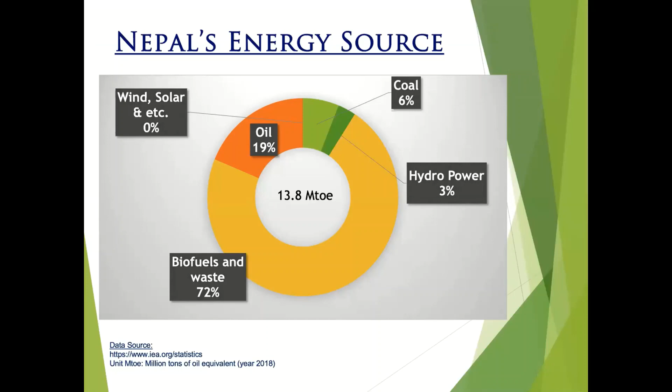The total hydropower electricity demand and supply shows that the private IPP has produced about 40% of total requirement, whereas NEA or government side is 35%. All the private sector projects are run-of-river, NEA has over 3% storage, and 22% of requirement is imported from India right now.

The theoretical hydropower potential of Nepal is 83,000 megawatts, and commercially about 43%, or 43,000 megawatts, is a commercially viable project, whereas the total installed capacity is only 1,273 megawatts.

So private sector has significant growth in this sector since the last 25 years. 55% of total capacity is produced by the private sector, about 5,000 megawatts is under construction by the private sector, and 10,000 megawatts is under study. Due to active participation of the private sector, the import of energy from India was reduced by 38% last fiscal year.

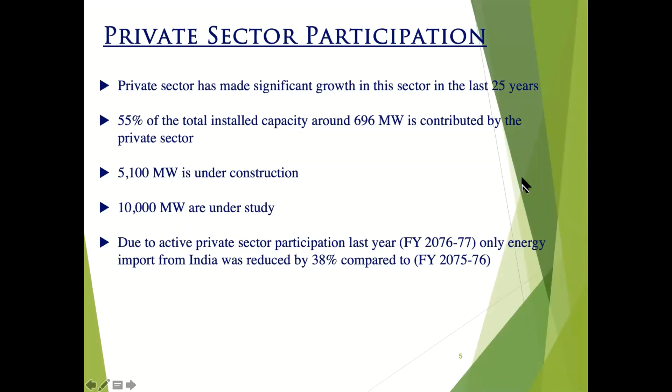So the opportunity in Nepal is very high, because political stability is there now. Before, the government changed every 9 or 10 months, but now the present government will go for 5 years. The government has announced the country will reach middle income status by 2030, which means we need a lot of hydropower or energy to achieve this goal.

Growth per capita consumption is described as 1,500 kilowatt hours. So institutional setups like transmission, generation, an electricity regulation committee, and a power trading entity have been set up by the government, along with positive policy changes and a new act under consideration.

The regional market is very high because our neighbor India has very big demand for electricity, for which a power trading agreement with India was done in 2014, an energy cooperation agreement with Bangladesh was done in 2018, the SAARC energy cooperation framework was done in 2014, and the Bangladesh, Bhutan, India, Nepal sub-regional cooperation for energy trade was also done.

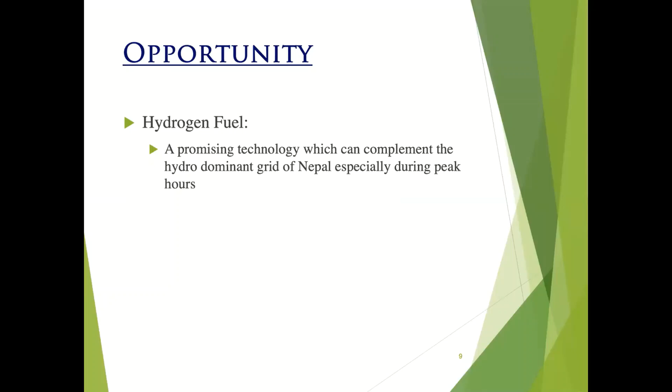At the same time, we came to know about hydrogen fuel, which we'll discuss later. Maybe the professors, scientists, and technologists will explain more about hydrogen fuel, getting hydrogen from electrolysis of water, and from that getting a fuel. We want to know more about this, and I think we'll hear in detail from another speaker. Let me say something about the challenges at the present status.

The transmission system and road network is still lacking in Nepal. Financial resources are needed for about 15,000 megawatts, as the government has declared that by 2085 (Nepali calendar), 15,000 megawatts has to be achieved. For this, about 3,000 billion rupees is required, and local bank and financial institution funding is, I don't think, adequate.

They need some funding from outside also. Direct foreign investment is required with a hedging facility, which is not available now, so the policy should be changed to achieve these goals.

There are many bureaucratic hurdles, causing delay in implementation. At present, it is sorry to say that inter-ministry coordination is not exactly what is required.

And the power generated by the IPP, the pricing and tariff should be competitive, and projects should be completed on time without cost overruns. Hydropower projects are prone to cost and time overruns worldwide.

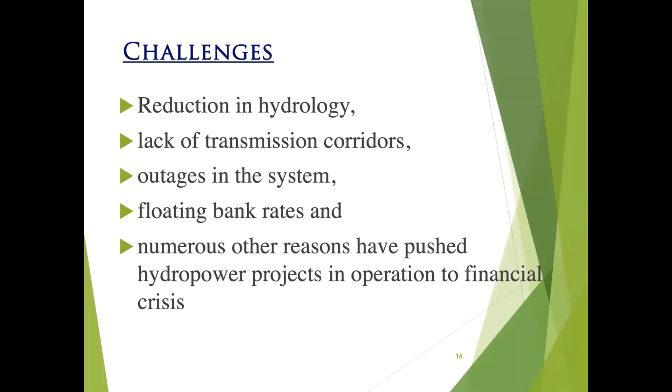The bank interest rate is not stable. Numerous other reasons have pushed hydropower projects in operation to financial crisis.

There are some other challenges also, some technical challenges also: workforce, geotechnical aspects, climate change and natural disaster.

Recently we have the COVID-19 pandemic. For its effect, we cannot forecast how much it will affect and how much cost we have to bear due to this pandemic. Because of financial crisis, the producer, the developer has faced so many financial crises, and because of the pandemic, the consumption of electricity is also reduced.

So what to do again? The way forward is to create a level playing field for all the stakeholders, private and government. A one window system should be there for all relevant clearances from the government side and from concerning authorities. Facilitate the FDI, as I told before, since local banks and financial institutions are not able to invest in huge projects. Expedite the construction of the transmission line.

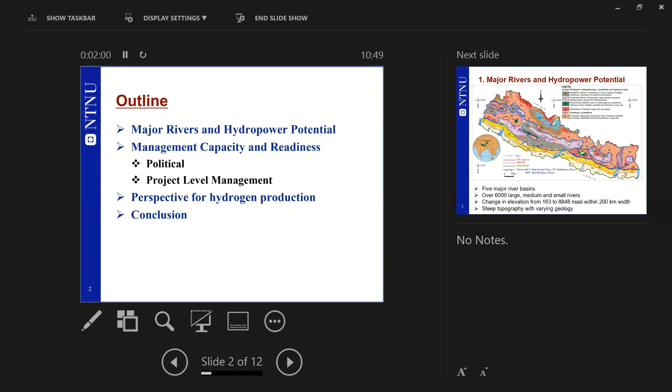If we look at this Nepalese map, we have many rivers in our country. We have 5 major river basins, 2 bordering with India and 3 major basins in between, and over 6,000 large, medium and small rivers that we can harness for our well-being.

The change in elevation is very dramatic from south to north. It starts with 163 meters, the minimum, and goes all the way to Mount Everest within a 200 kilometer width. This is incredible for us and a huge asset in many ways. We have a very steep topography, which allows us to have very high hydropower projects. We have some challenges with rock engineering and tunneling because of the varying geology, but these are not major issues. Once we have good knowledge about this, all kinds of difficulties can be tackled, in my opinion.

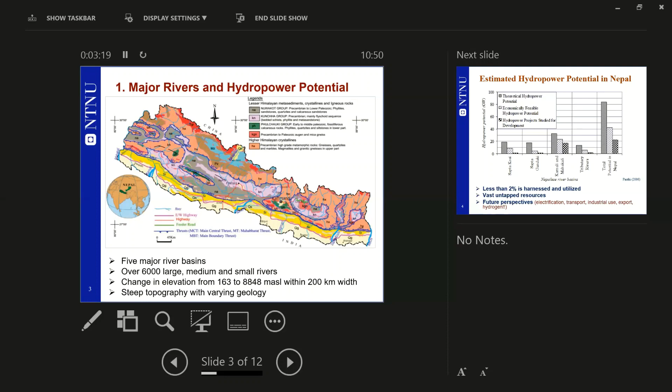If we look at the hydropower potential in the country, this picture shows the total possibilities we have. Over 83,000 has been officially mentioned, but I think it is much more than that; we have not studied how much we can really produce theoretically in Nepal. I think it should be over 100,000 with no difficulties. But today's condition is that we have harnessed even less than 2% of the potential. It would have been done much more, in fact. Even this 2% is difficult to use in the monsoon period. That shows how far behind we are, which is an issue of discussion.

Energy should be used, and it's a commodity; society will use more and more once the society is developed, so development is key here. How we can utilize these untapped resources is a major discussion that the government authorities should study and focus on. The political level management should be more educated in these sectors. They should know the best way to use the resources of the country, look at the long term rather than the short term, and make a framework that makes sense.

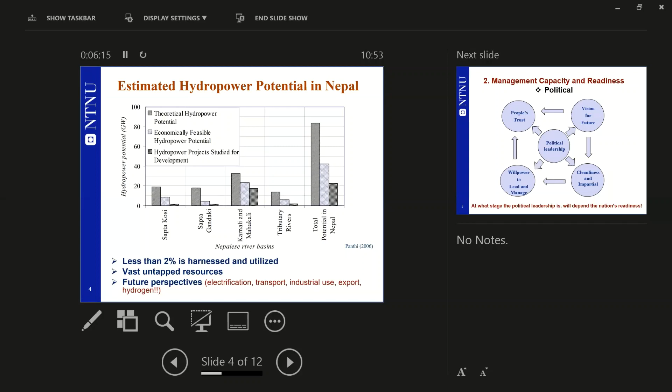If we look at management capacity and readiness, I would talk first about the readiness of the political level. Political leadership is at the center and is key for the development of any nation; it is the guide to bring a nation forward. It is not only about stability, vision is very important. We need a very visionary leadership with a good vision for Nepal's future generation. Beyond that, they should have cleanliness and be impartial. They should control corruption, control the misuse of power, be honest to the people, and be impartial.

But the tendency of our leadership is not in that direction. Therefore, the key is improvement of management capacity within political leadership; this is the very key. The present leadership has emerged through struggles and fighting to change the political system in Nepal, but how clever and capable they are in managing government institutions is a matter of discussion. One should have very good vision, cleanliness, honesty and impartiality in leading, and the leadership should have the willpower to manage and deliver things in the right way.

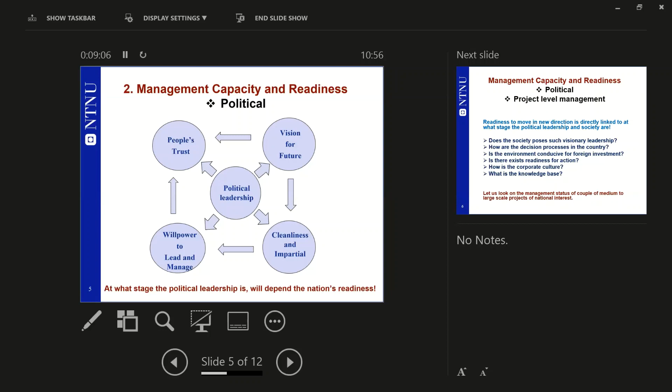So the readiness to move in this direction is mainly through the political level, which is very important. Are we ready to move in this direction? Is the political leadership and society ready? Does the society possess such visionary leadership in Nepal? When will it come? If not, if this is a visionary, then when will they act in the right way is a very important issue.

How are the decision processes in the country? How quickly do they make decisions? How is the bureaucracy? Are they efficient? Has the leadership managed to change their mentality? This is a matter of discussion.

Is the environment conducive for foreign investment? Are many international corporate companies eager to invest in Nepal? What is the investment capacity? This has to be looked at also, because to change to mass large scale production of, for example, hydrogen, we need huge investment, and we should have the possibility to export this energy abroad. So we should have linkage and know how to transport, from where to transport. These are also issues.

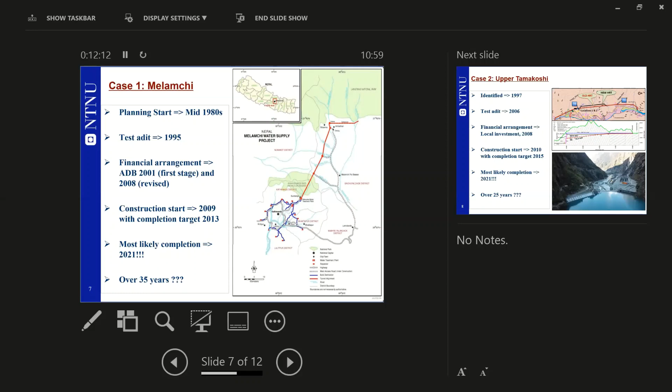And if we look at Upper Tamakoshi, it was first identified in 1996 or 97, and test adit was excavated in 2006. Financial investment was managed in 2008, and construction was supposed to be completed in 2015, but it has not been finished yet, and most likely it will be finished in 2021. So over 25 years to build a medium level project. This is what we are.

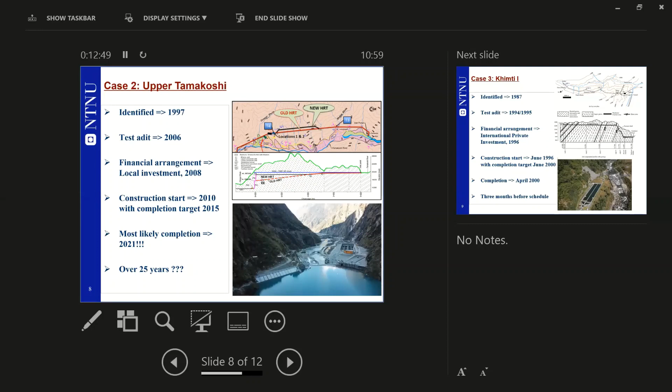But this is not the only case, we also have successful cases like, for example, Khimti. It was a private investment, the first private investment in Nepal, identified sometime in 1987, with some investigation or test adit work during 94-95. Financial closure happened in 1996, and construction completion happened even before the stipulated time. So it is possible to manage projects in the right time even in Nepal, but we should have very good and right direction on it.

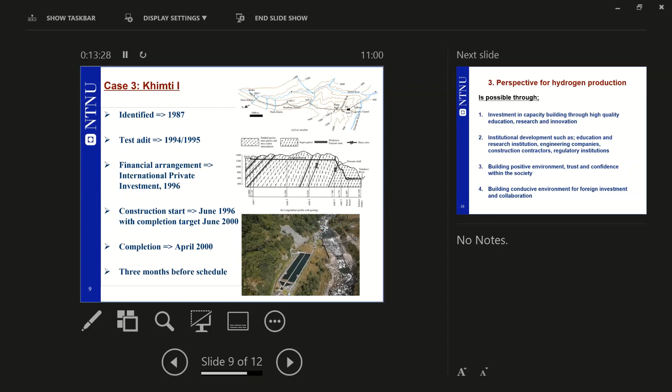So what is the perspective then? Investment in capacity building through high quality education, research and innovation is needed for the country. Institutional development such as education and research institutions, engineering companies, construction contractors, regulatory institutions are very important to go in the right direction. Building positive environment, trust and confidence within society is key. Building a conducive environment for foreign investment and collaboration is a must. This is the area where we should focus.

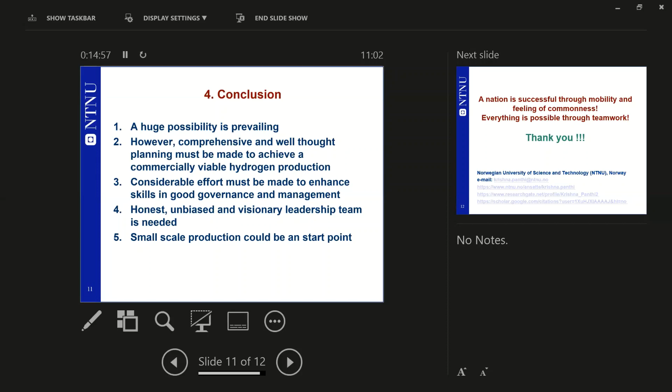Thank you, Professor Panthi, for highlighting the potential use of energy for the hydrogen market. But despite the potential for hydrogen, as you mentioned, there's a requirement for visionary leadership in terms of policy as well as management to attract FDI projects, so that the environment is conducive for large-scale industries to come in. Thank you.

With that note, I'll move on to a very exciting topic. This will be presented by Professor Ole Gunnar Dahlhaug, and his topic is European perspectives on hydropower to hydrogen application, and the message from there to Nepal. I happen to have worked with him while I was at the Hydro Lab, so nice meeting you again, Professor Dahlhaug. He's a professor at the Department of Energy and Process Engineering at NTNU, and currently leader of the HydroCen project at NTNU University, which is the largest R&D project in hydropower in Europe. With that note, I hand the mic to Professor Dahlhaug.

Thank you, Pratik. Krishna, can you turn off your view so I can show my screen? Just a minute. Stop presentation, sir, there is a stop presentation option. Yes, I have not left my presentation, I think. How to do that? Stop sharing, and then Professor Dahlhaug can share his screen. Yes, thank you, sir. All right, I'll try to make it visible. Let's see if I can. All right, can you see my screen now? Yes, yes. All right, okay, thank you.

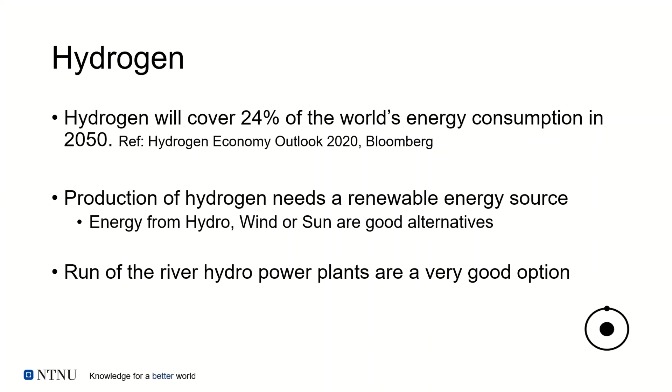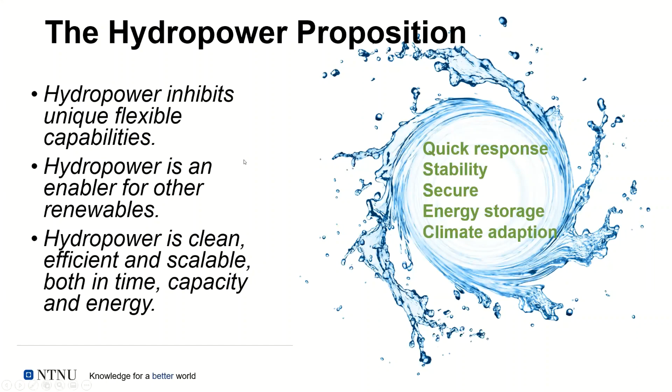Right now, 26.5% of the electricity generation in the world is coming from renewables. Out of this, 16.4% is coming from hydropower. And we know we have 4 times more capacity, meaning the potential is 4 times more worldwide. For sure, some of this will be utilized to generate hydrogen.

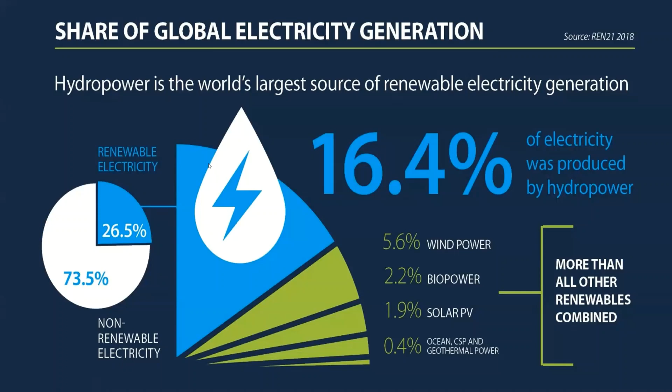The European ambition is targeting 32% renewables in 2030—I think they are now talking about 33. And it has to be carbon neutral by 2050. That's the ambition we have, and of course Norway is coming along on that ambition.

Just take a look back at what has been done. As early as 1991, Germany introduced the first feed-in tariff for renewables, meaning if you had renewables and put them online, you got extra paid for it. In 1997, EU had a target of 12% renewables by 2010. Looking forward to 2009, the target was 20% by 2020. Today the target is 32% by 2030. The whole thing here is that we are going from feed-in tariffs or extra payment for renewables to extra cost for emissions. There's no doubt the Paris Agreement introduced tariffs or extra cost for emissions in the system, meaning it will no longer be feed-in tariffs for new renewables, but taxes for emissions. That's the big change.

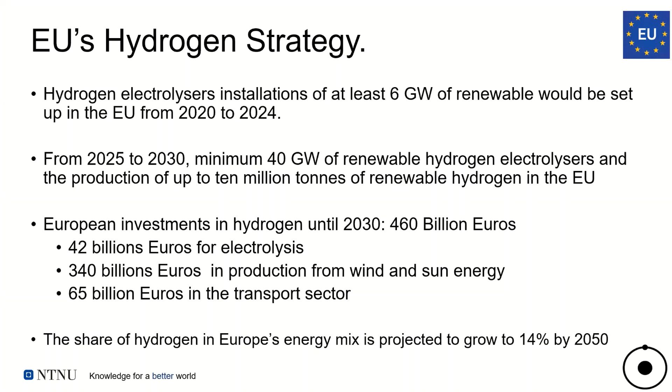If you look at the Norwegian ambition, we are of course following the EU ambition, and sometimes we tend to go a little bit higher. In our case, we aim to reduce emissions by 50% by 2030, and we aim to reach carbon neutrality by 2050. It means the emission has to be reduced by 95% compared to 1990.

The production of hydrogen, in our case, can come from natural gas. If we capture the carbon, the CO2, and store it, then it's called blue hydrogen. But that's an intermediate solution, at least until it's cheaper, and for a period of time it's a possibility for Norway. But in the long run, we will utilize hydro, wind, waves, sun, and biomass.

Right now, the Norwegian Research Council is giving money for the development of technologies that can produce hydrogen from these renewables. We have a history of producing hydrogen - we had electrolysis above 100 megawatts in the 1940s. So we have some information about it and some experience.

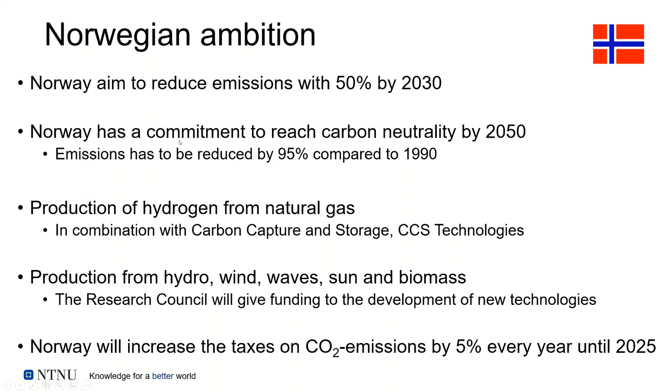I know that Nepal has a huge possibility, and its system is maybe better to handle it than the Norwegian one. You have a large hydropower potential, technically and economically feasible - I heard 42 in the former presentation. You have mostly run-of-the-river power plants, meaning excess energy available in monsoon season, which is perfect for producing hydrogen. It can be produced in small local units, and can be done without grid connections.

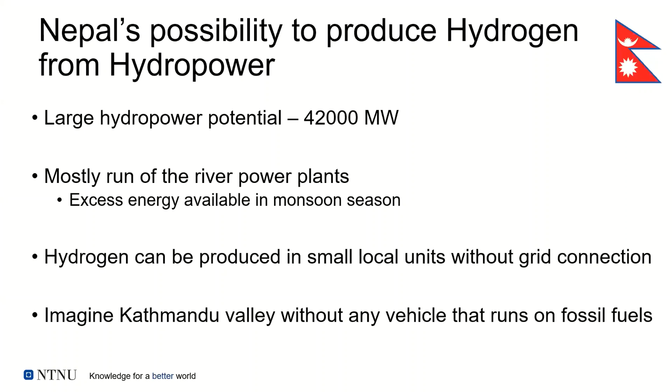Imagine Kathmandu Valley without a vehicle that runs on fossil fuels - it would be a better place. No doubt about that. I believe it can be handled. I think it's possible. Thanks.

Thank you, Professor Dahlhaug, very interesting presentation from the European perspective. I didn't have all the data, but I can see from your presentation there's an immense potential coming up for the hydrogen market as an energy source, especially in the form of transportation. Like you mentioned, if we could use it in Nepal from the monsoon surplus energy, and use that in transportation to supplement the oils and fuels we have been buying from abroad - from our own water resources, that would be amazing. Using water itself to produce energy, and then splitting the water again into hydrogen - this is amazing. To me it's fascinating, but definitely it has to be commercially viable. Thank you for your very nice presentation.

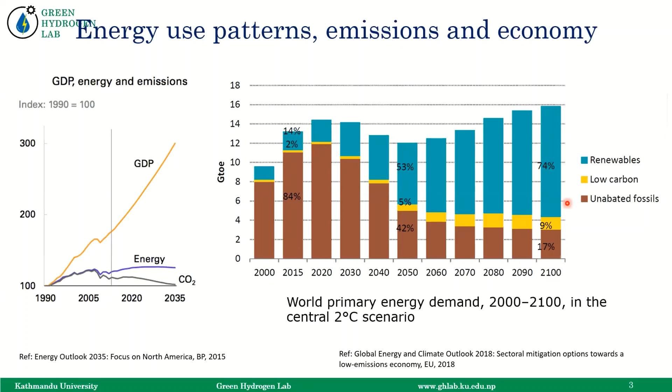If you go to 2100, you can see almost 80% of energy is not from fossil fuels. That's a huge change, and that means a lot of things happening around the world - solar, wind, and other parts as well. A lot of people see hydrogen as one of the major components - that's a key thing that drives the change.

From 2015, projections to 2050 show the consumption of hydrogen or demand for hydrogen will rise more than 10 times. Right now we are limited to feedstock industries, some chemical processing industries, but many new dimensions are coming up. A big part of the energy will be consumed in transportation. A huge part of energy from hydrogen will be consumed in industry, building power, new industries, power generation.

So a lot of new things are coming around the world, and that will change the economy, change our employment patterns, change our politics, and change what we should teach in our university to provide new batches of engineers and policymakers to make these changes. That's a huge change. We can feel that by 2050, the world will not remain as it is right now - it will change quite a lot, and hydrogen is one of the indicators that will drive that change.

In Nepal, there was some hydrogen application in the past until 2013 - we saw some hydrogen industries, or industries based on hydrogen, but suddenly it dropped down. There are many reasons behind that, but we want to see new industries coming up, maybe taking over this part of the transition in future. That's our role, that's our generation's contribution.

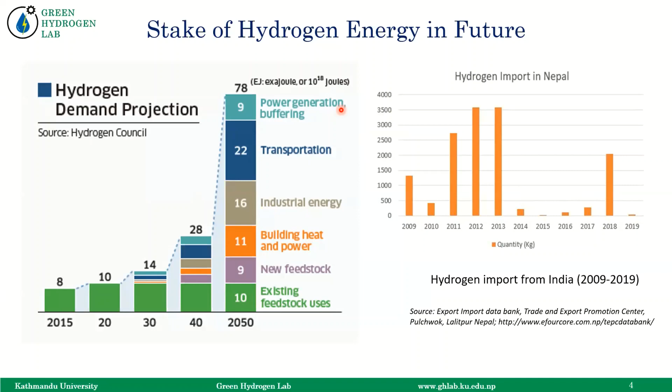We see hydropower as a contributor, because hydrogen is not a primary source of energy - it's a secondary source, an energy carrier actually. So we need a primary energy, maybe from natural gas, solar, or wind. In our case, we have hydropower - more than 24,000 megawatts of hydropower are in some stages of development, and by 2030 we can expect 7,000 megawatts of new hydropower plants being developed in Nepal.

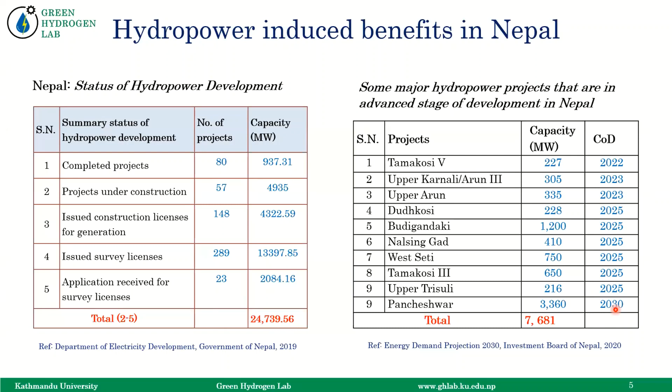That's a huge project, huge prospects, and that's our opportunity - we should be able to cater to them in some ways. Of course, a lot of debates are there to export the electricity and make money out of it, but Professor Panthi has outlined that's not the best way to do it - we need to consume something inside as well.

If we see in 2030, the demand of hydropower locally, in the best scenario with all cooking stoves changed into electricity and 50% of small vehicles converted into electric vehicles in Kathmandu Valley, the demand will still not rise more than 10,000. But in the best development situation, we will have 18,000 megawatts power generated. So we can clearly see the surplus amount of energy that is there if we don't intervene, if we don't have new industries, if we don't have new solutions to the problems we are facing right now.

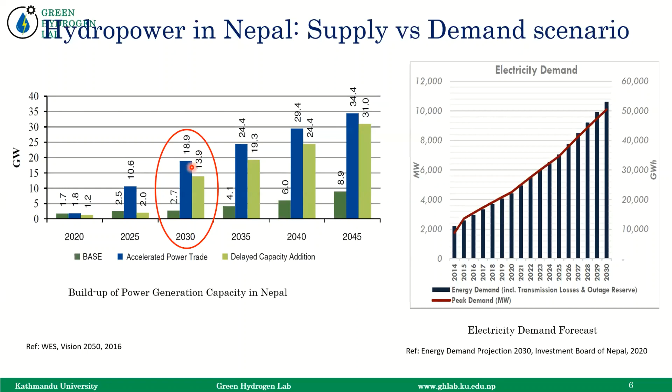That needs some critical thinking. Professor Panthi has quite interestingly led the foundation, and that's where the political activists or political movements should have a better idea. That should be where universities should contribute.

If we are able to sell or utilize that electricity, at least we can have some projections by 2025. If we start to export or utilize that electricity in a better way, then this is the scenario. The projection has shown that Nepal has an immense possibility to become rich just by utilizing hydro energy, $3 billion per year in 2030, and that could be as high as 10 billion per year in 2045, just by utilizing our electricity, maybe through export or other forms. This is a huge opportunity for our generation.

But some other studies have a bit different findings. So even if we develop our hydropower, we can see what the scenario of petroleum products will be. It has exponential growth. I was quite surprised, quite angry actually, to be honest. I don't want my country to be hydro rich and still dependent on rising fossil fuel use, particularly diesel, which is shown as the trend and will keep increasing. Diesel is normally considered a fossil fuel that cannot be decarbonized.

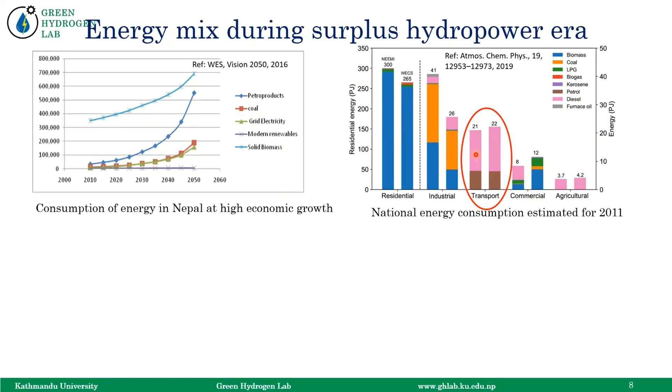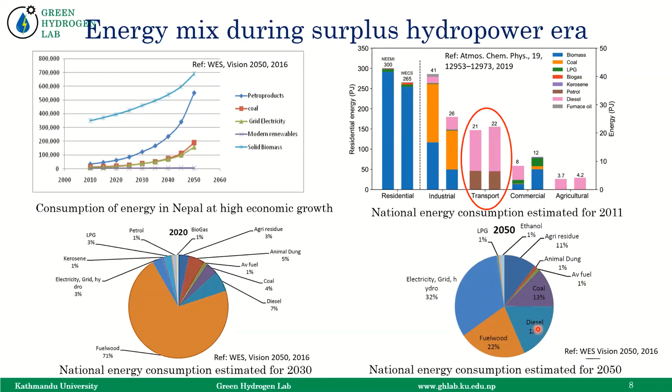The projection shows, if things go like this and Nepal becomes rich by exporting hydro energy, what will happen? From now, if things continue like this, we have 7% dependency on diesel, and that will rise to 18%. That is huge. Right now, billions of dollars are going to India and abroad just to import diesel. And if it takes 18% share in our economy for energy, our generation won't be happy about that. I think the next generation will feel very bad about our generation, that we knew it was going to happen but did nothing to intervene. The rise of diesel consumption from 7% to 18% will be, to be honest, a curse for our country.

There are some other challenges. We are still considered a very, very poorly developing country, where the rest of the world is crossing towards $20,000 per capita, while we are stuck at $1,000. Trade deficit is immensely high, nearly impossible to recover from. Farmers are standing in queues despite coronavirus, with no social distancing. A lot of people are just standing in queues, which can be as long as 2 kilometers in some cases. So many things are happening.

But on the other side, 200 megawatts of spill energy is happening every night this monsoon season. It's expected that 400 megawatts will be spilled next year, and that will continue to increase. Our grid quality and reliability for power trading is not good. In this condition, India, for example Tata Power and other companies, isn't going to buy our electricity because of our low quality of power and reliability. Our projects, particularly small ones, are getting sick and close to bankrupt. Due to the excess grid, the micro hydro sector is on the verge of collapse.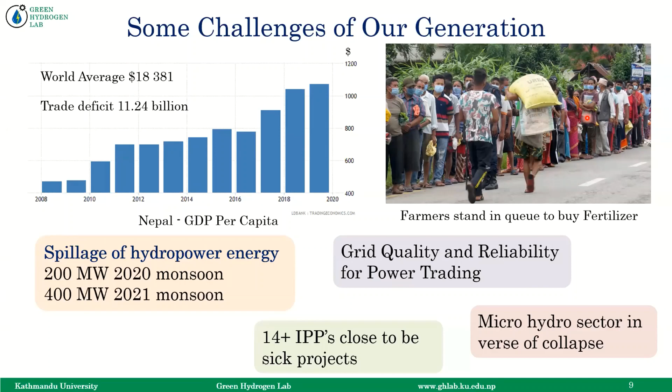So this is the challenge for our generation to tackle, for our leadership to handle. I see there are of course political and other areas, but hydrogen could be one of the interventions we can make. We can learn from others and implement it in our case. Maybe on transport to replace diesel, maybe on electricity for grid balancing and maintaining quality, new industrial processes, fertilizer plants, chemical industries, a lot of mining industries are coming up. The next business in Nepal is heading towards mining after the cement industries.

And of course, we have the possibility to export. If Norway and Europe are consuming a lot of hydrogen in the future, why not Nepal can export? Why not Nepal can be an exporter of hydrogen in the world context? That's part of our study. So that is our realization, the institutional realization of Kathmandu University, that led to form something we call the Green Hydrogen Lab. And I am trying to push our research. We were approved on the 2nd of August.

So it's less than 2 months old, but we have been able to find very good and competent researchers that are working on different aspects. We carry the vision to strengthen our industries in Nepal to produce, store and transmit hydrogen at commercial level. Our vision is technology transfer and local adaptation.

We cannot do the fundamental research right now, but of course a lot of countries are doing the fundamental research. So our aim is to transfer the technology, adapt it to local conditions, do the research that our country and our industry needs, and produce the human resources that can handle future projects in Nepal.

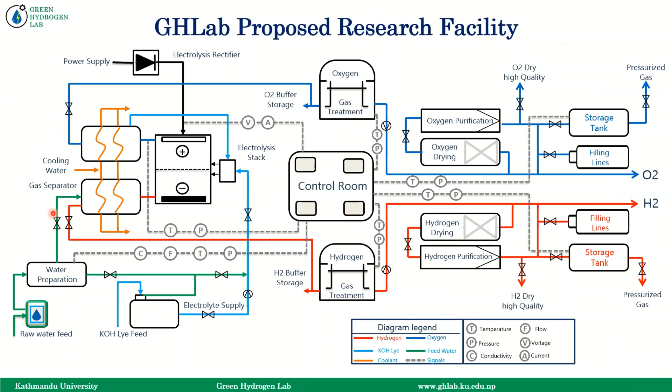We have so many things going on. We have proposed a full-fledged lab. I will not go into details, but so far we have done all the contributions from the university alone. But the university alone cannot do it by themselves. We need contribution from industries, from the hydropower sector, from government agencies, from grant agencies, to build up the facilities, to conduct the research, to transfer the technology, and to create the human resources that we need in future.

The priority is what we call green hydrogen as a fit. This is the new technology that can make the country, Nepal, and the region fit — fertilizers for Nepal, food security and food stability, industrial sector. We can have a boom in the industrial sector through introduction of hydrogen, particularly in mining and iron processing industries right now, and also in transport in future.

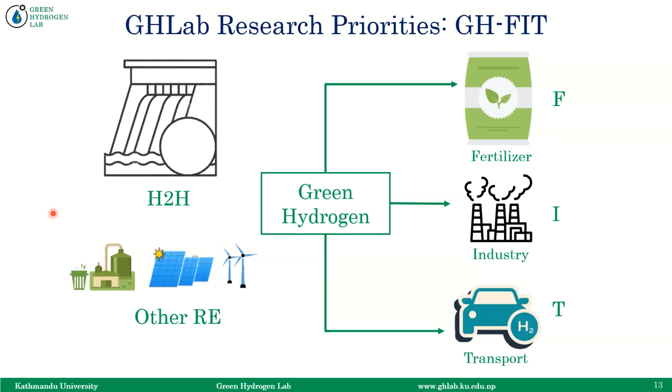We focus on hydrogen through hydropower at priority, but also from biogas, wind and solar as well. We have already started to talk on the demonstration project level. This is one project that Kathmandu University and NEA Engineering Company are jointly working on. Hitendra Dev Shakya, MD of the NEC, will discuss more about that.

But we can say we want to start with something real, practical, implementable, and having some impact — small scale, 500 kilowatt, producing urea for fertilizer. That could initiate a lot of things; we can learn so many things from this project, and so many experts can be engaged with us. If we are successful in this project, of course that will open a door.

Maybe Nepal can cater to 100% of the demand for urea locally. Maybe one day Nepal can export urea back to India, because India is still importing urea from Saudi Arabia and other parts of the world. Of course, economy, technology, market competitiveness, political readiness — everything is there.

But from the university perspective, this is our move, and we keep on moving. We keep on pushing people to make the conscious decision. That's the role our lab and university has taken up.

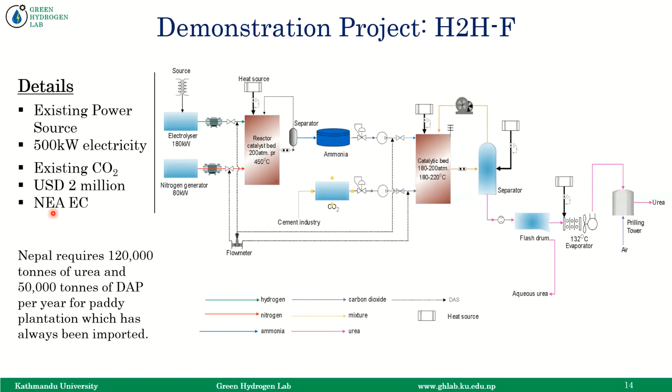So this is something we like to visualize: Nepal in 2040. We want to see Nepal as a green hydrogen ecosystem. Of course the rest of the world, particularly Europe, will achieve something like this in 2030, as Professor Ole Gunnar mentioned. But at least for Nepal, if we start today, maybe in 2040 we can say farewell to fossil fuels and invite a lot of electrical-based technologies, driving from hydropower, solar, wind, and biogas.

And of course we want to see the green hydrogen lab evolve and contribute to the development of hydrogen-based industries in Nepal. Then maybe one day we want to export hydrogen to Europe and the rest of the world. Maybe our economy and our society will be driven by hydrogen into smart cities, industrial revolutions, and hydrogen fuel transport systems.

So this is a dream that academia wants society to have, and politicians to take up as their agenda. And it's not impossible — like Ole Gunnar also mentioned, it's possible, it's practicable. The world is moving. If they are moving, we should move, and maybe at sometimes we can lead, at least in our country, in our region.

So I did not talk about the technical matters, but this is what we are working on. There are so many technical details, so many challenges, so many things to be considered — safety issues and other issues. My colleague, Professor Bruno, who is the team leader of the NTNU hydrogen team, will explain about the challenges. But from the academic perspective, these are the opportunities that we can feel, we can dream, and we can realize. Thank you very much.

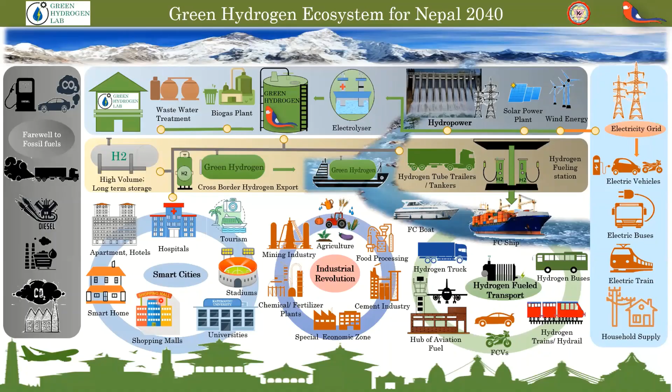Thank you, Dr. Biraj, very enlightening, and thank you for continuing your effort on the green hydrogen lab. Definitely, I think the dream of replacing fossil fuels with hydrogen energy, using hydropower as a primary source and creating a secondary source of energy using hydrogen, not only in terms of transportation, but you have brought out a new area where we use it even for urea. So I think there's immense potential. Wherever there's a will, there's a way. So with that note, I think...

I would like to come to the next presenter, another very exciting presentation from Professor Bruno G. Pollet. His topic is Challenges with Hydrogen Technologies and Lessons Learned from NTNU. That could be a very good lesson for Kathmandu University as well as for Nepal as we try to embark on utilizing the immense potential of hydropower that we have for generating hydrogen. With that note, I hand over the mic to Professor Bruno. He is a professor at the Department of Energy and Process Engineering, and he's the leader of Team Hydrogen at NTNU, which is the largest hydrogen project in Norway. It will be very exciting to hear from you the challenges on the technology and if that is suitable for a country like Nepal, where we are still struggling with a lot of technological aspects. Okay, over to you, Bruno.

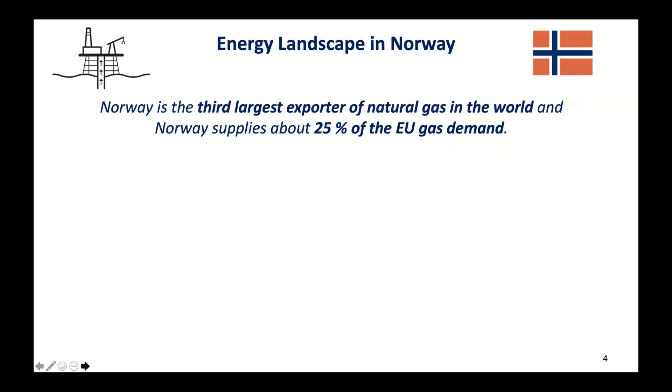I've been in Norway since 2017, coming from the UK, and I was very interested about this country because not only are they plentiful of oil and gas, supplying about 25% of the EU gas demand - it's one of the biggest economies - the second largest is actually the fishing industry, and they're also very blessed with renewable electricity, 98% coming from renewable sources, mainly hydropower.

These are exciting times in hydrogen. I've been in the business for nearly 20 years, and I've never seen such enthusiasm around hydrogen. Every industry I've been talking to is now focusing on and looking to deploy hydrogen systems into businesses, countries, and societies, and this is really exciting times. In terms of Norway, we really want this to happen - we have a strong hydrogen value chain, and as educators and practitioners, what we want is to educate the next generation of technologists and scientists into this exciting area.

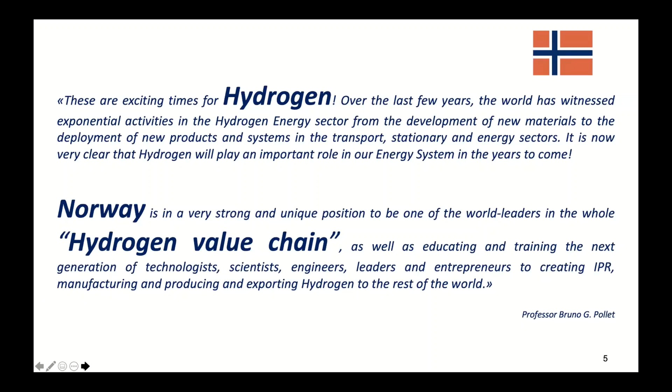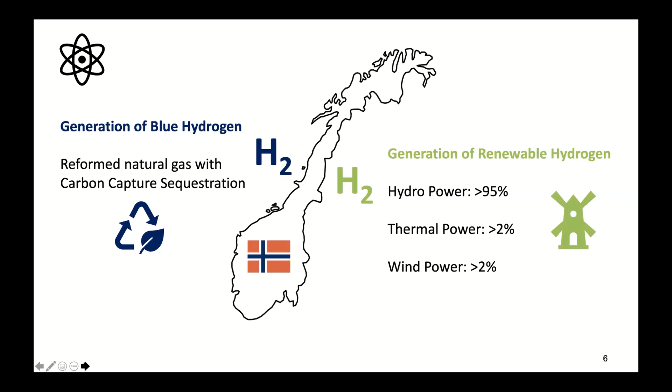At present, we have two possibilities here that we are looking at: generation of blue hydrogen, basically reforming natural gas and using some kind of CCS systems, and something that we're very keen on - the production of green hydrogen, renewable hydrogen, trying to capitalize on what we have here: hydropower, thermal power, or wind power. A study done by SINTEF a couple of years ago estimated that by 2050, the market for exporting hydrogen from Norway could amount to 20 billion euros in annual revenue, and could potentially employ more than 25,000 jobs, which is really good news.

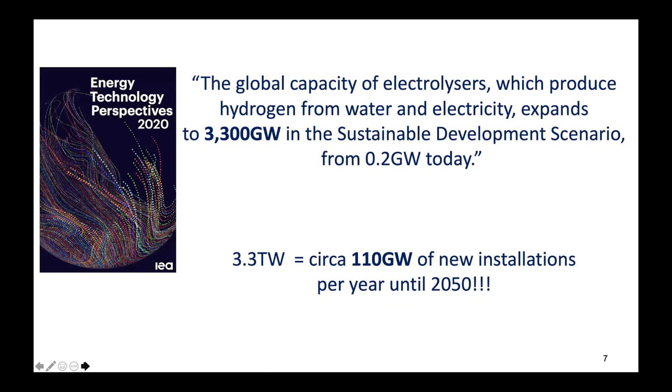Another piece of good news, which also comes with challenges: an early report from the IEA states that the global capacity for electrolyzers - producing hydrogen from water and electricity - could expand to 3.3 terawatts in the sustainable development scenario, from 0.2 gigawatts today, which is huge, absolutely huge. We're talking about around 110 gigawatts on average of new installation per year until 2050.

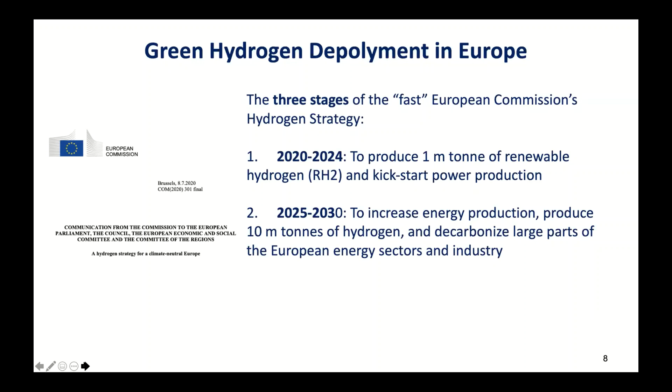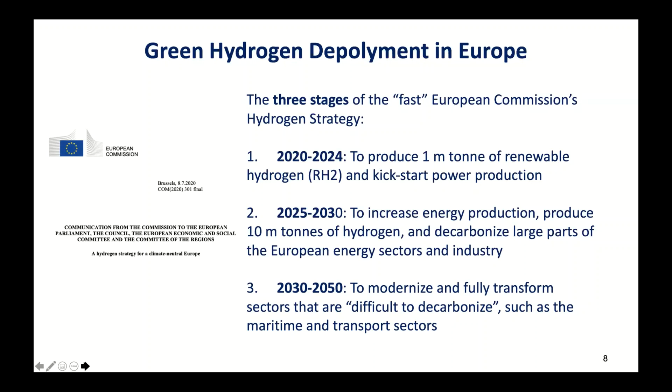Ole Gunnar mentioned that very nicely, and we are on a very good pathway here. So the green hydrogen deployment in Europe has 3 stages. We're looking at 2024 producing 1 million tons of renewable hydrogen to kickstart the production, then 2025 to 2030 to increase production to 10 million tons of hydrogen, trying to decarbonize a large part of the European energy sectors, which is, as we know, very dirty. And by 2030 to 2050, try to modernize and fully transform sectors that are really difficult to decarbonize, such as maritime and the transport sector.

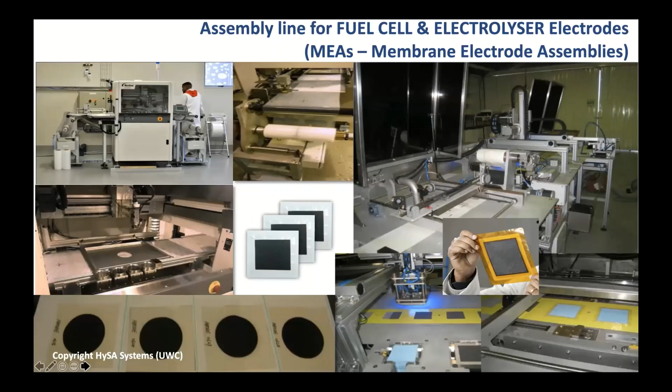But obviously, to come with that, we have challenges. We need to see more fuel cell and electrolyzer companies, from systems to components. At the moment, we are a bit lacking this in Europe. This is an example of a pilot plant developed in South Africa, but we have to kickstart somewhere to try to deploy that manufacturing into different sectors. This is another example of fabrication of fuel cell and electrolyzer stacks, which is important for the transport sector, stationary sector, but also for producing hydrogen via electrolyzers.

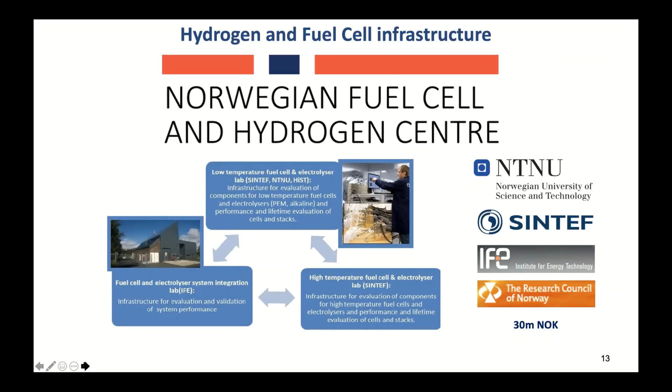Here in Norway, we have a strong infrastructure in terms of hydrogen fuel cells, and this is what we need in order to really test the validity and integrity of materials before they go into a proper system which could be commercialized. So we have this Norwegian Fuel Cell and Hydrogen Centre, which is split between NTNU, SINTEF, and IFE, and it was sponsored by the Research Council of Norway.

Also at NTNU, we have a wide range of systems and equipment to test, from nanomaterial to system integration, for fuel cells and electrolyzers. And the most important thing that I always keep talking about is education. We need to really educate the next generation of engineers, scientists, and economists in that new area.

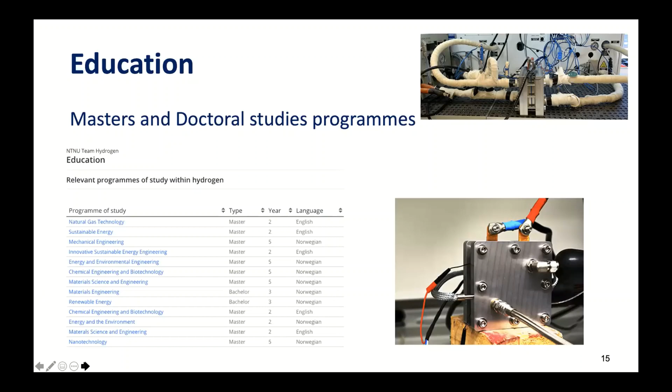So we need to implement masters and doctoral study programs in order to fulfill the requirements of that new industry. Let's say an electrolyzer company is being set up, we need to have the know-how and capabilities to get qualified people to work in those sectors. But also in terms of the technology, low temperature fuel cells, mainly used for the transport sector, have problems in terms of the expensive material, the PGM, the platinum group metal we're using is quite a substantial amount.

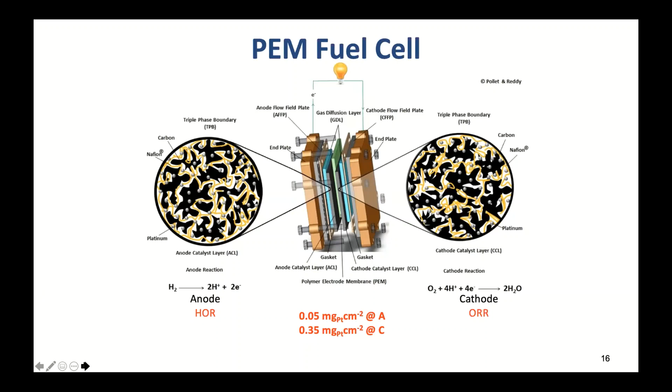We've done quite a good job. We're trying to move away from PGM to something which is cheap and cheerful, but still as durable as platinum. In terms of water electrolyzers, at the moment we are looking at two commercial technologies: the alkaline electrolyzer cell, and also the proton exchange membrane water electrolyzer. The proton membrane electrolyzer also uses an expensive platinum group metal, iridium dioxide, and we're trying to move away from these expensive catalysts.

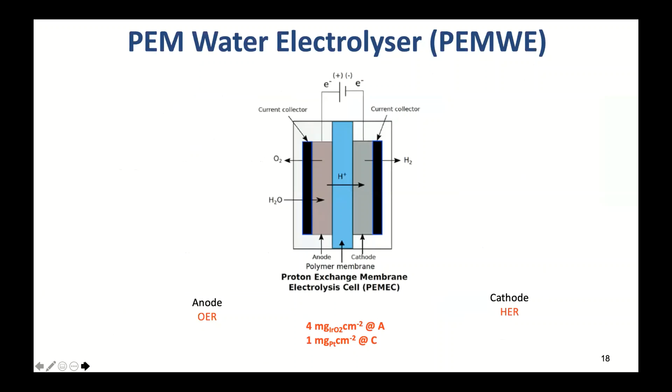If we compare to PEM fuel cells, we are actually using quite a lot of PGM in a PEM water electrolyzer. So in terms of the water electrolyzer systems, we have to focus on minimizing the overpotential and the resistance that we're seeing in those systems. If we look at efficiencies at, let's say, 40 kiloamps per square meter, we're looking at about 55% efficiency, which could really be improved.

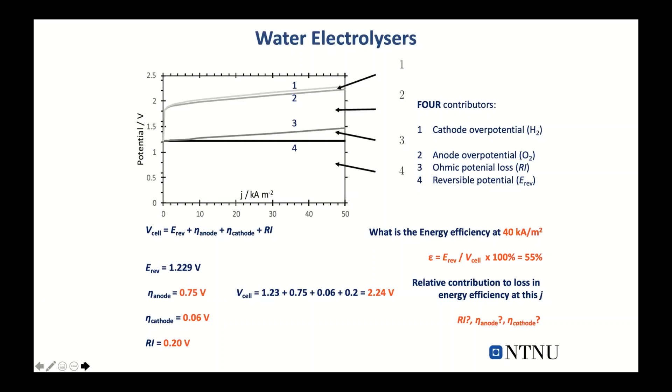So what do we need to do? We need to look at new materials, try to improve the catalysis, improve the durability, improve the overpotential and the resistivity or conductivity of the material and electrolyte. So for those two platinum group metal systems, we need to focus on reducing the loading or replacing it altogether.

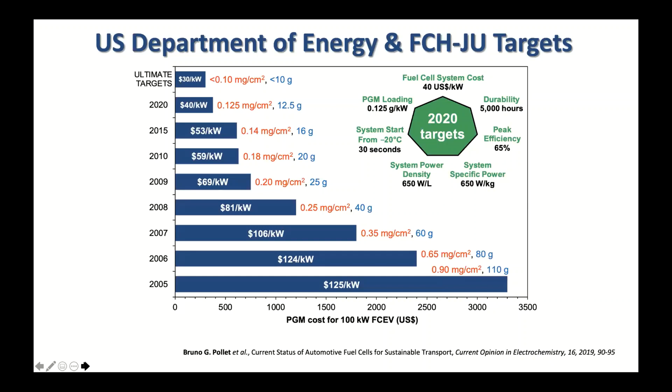But over the years, this is a paper I published with an ex-colleague of mine, Shyam Kocha, where we show the evolution of platinum use over time. We've done a very good job in the last 15 years or so. We've reduced the loading of platinum by nearly a factor of 10. The system is still a bit expensive though — nearly a third, even half, of the system cost comes from the platinum, which is quite a lot.

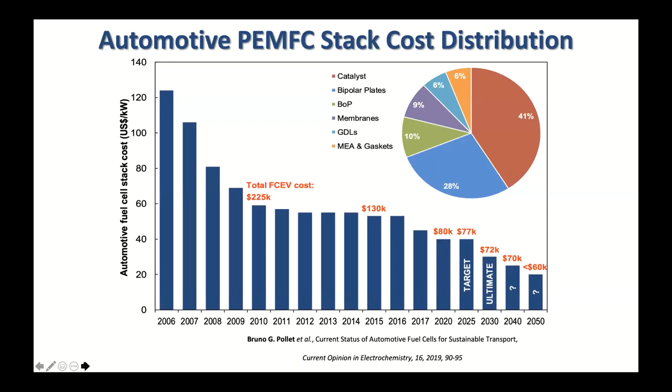We need to reduce that. But if you see over the years the evolution, we've done quite a good job in terms of the material and system as well. So for those who are interested, this is a paper that was published last year on the subject. So let's give an example here.

I'm going to be very quick, but if you have a 10 fuel cell stack of 100 kilowatts, let's say the cost is about 30 euros a gram for your platinum. You're looking at about 40 grams of platinum, about 1,200 euros, which is quite expensive. It's actually more expensive than buying an internal combustion engine from some parts of the world.

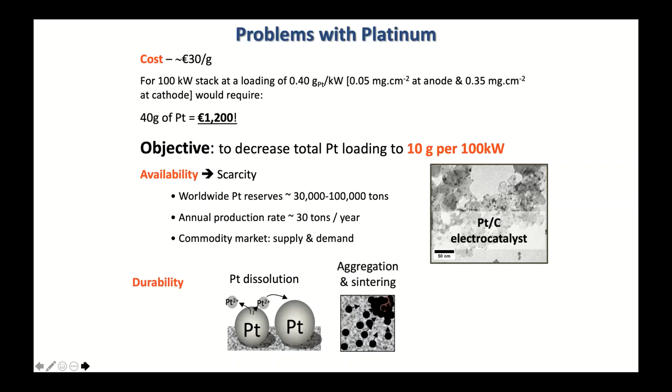So the main objective is to decrease that to proper loadings, or even remove it once it falls to some non-PGM metals. Obviously, scarcity is a problem, and PGM durability is a problem as well. We see platinum dissolution, which also causes aggregation and sintering, and we get carbon corrosion happening on your catalyst.

There are also other challenges which, for me, are the showstoppers really. We don't have a regulatory harmonization for the European region in terms of a framework to support, or not, power to gas. We also have no European coordinated approach or joint effort on health and safety and technical integrity for hydrogen injection into natural gas grid networks, which would impose uniform regulatory legislation across Europe. Also, the cost of water electrolyzer and fuel cell systems are quite high, as I mentioned earlier.

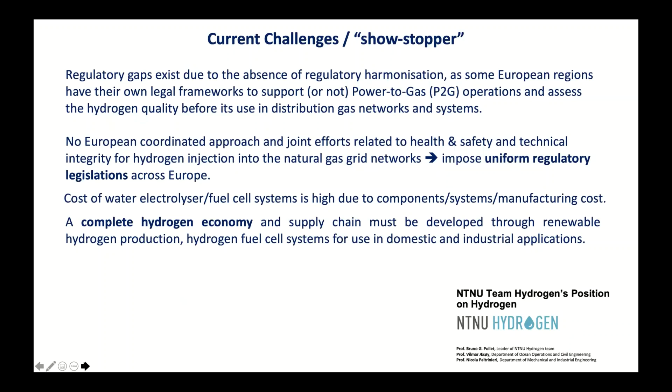For the complete hydrogen economy and supply chain, we must deploy that supply chain through renewable hydrogen production and hydrogen fuel cell systems for use in domestic and industrial applications. Another point we need to focus on is other fuels, or other alternative energy carriers, like ammonia, for example, which is especially important for the transport sector, like the maritime sector. But there we have a lack of effective and safe infrastructure.

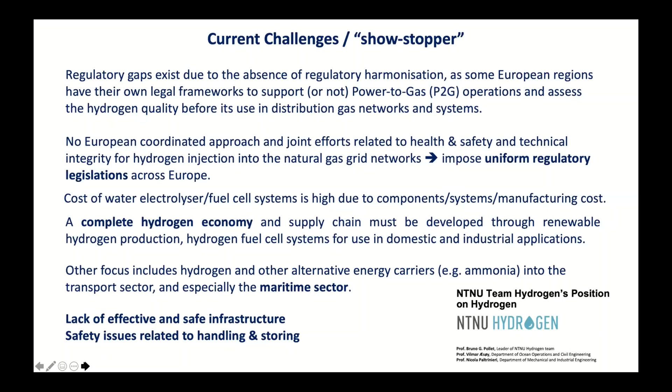Safety issues are also related to handling and storage, so we have a lot of challenges to overcome. Coming back to infrastructure, we need to look at compressed hydrogen and liquid hydrogen for logistic handling, some kind of bunkering system and procedures. We need to overcome those barriers of safety and implement proper procedures, and look at new advanced materials for those types of fuel storage.

We need to look at total system integration—not only fuel cell based, but it could also be battery fuel cell, battery for example, to shave the peaks. Also look at other types of electrical systems, say DC for example. So there's a lot of things to be done.

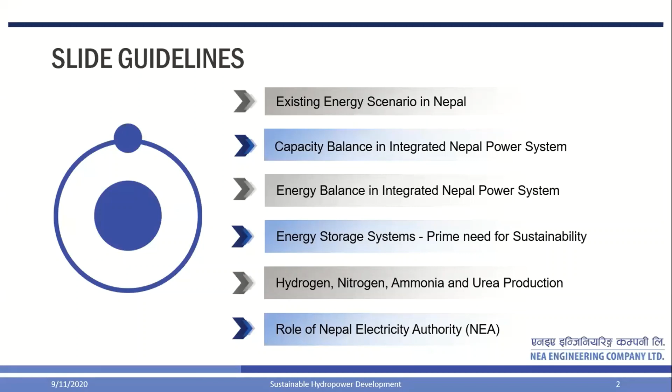And I'll be talking about the existing energy scenario, which again is the same thing everybody talks about in the energy sector: capacity, energy balance, and energy storage systems as a means for sustainability. And the favorite subject here, hydrogen and ammonia and urea production, and finally the role of the Nepal Electricity Authority in the above sector.

Although we are under pressure to inflate the peak demand so as to accommodate more power purchases in the past, that is good in a sense - the power purchase scenario, power generation from private sector has taken speed like a locomotive. So it is increasing, and it's good.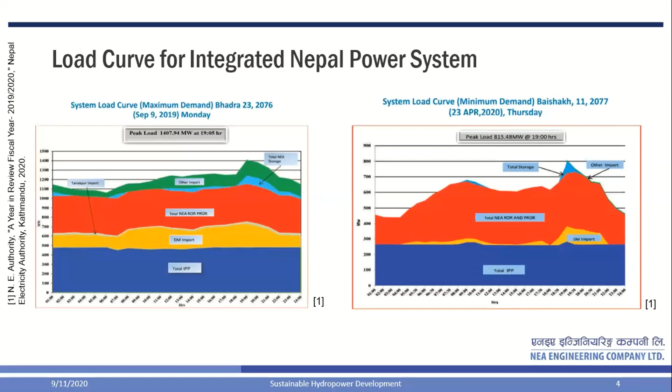That's interesting, good for us, good for the utility, because the hydro generation is almost constant over a day - it doesn't go up and down - so the demand should also be following like that. We would wish so, but it doesn't. Sometimes, like on the right hand side, the demand goes up and down, but the supply is constant.

Going forward from 2020, as the earlier speaker already presented, there's a massive growth and momentum, and generation is projected to go up. By 2030, the yellow line shows capacity, and the blue line is a very optimistic demand projection. If we do nothing from the government side, and for the other industrial sector we go business as usual in electricity consumption, even that projection may not happen.

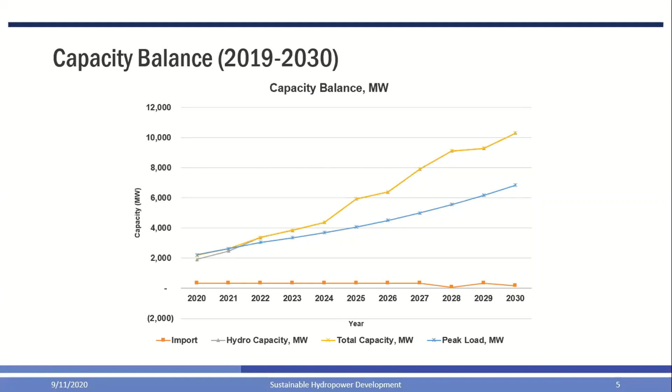We need policy interventions to increase electricity consumption in the domestic, agriculture, and industry sectors. And one of the areas is using surplus electricity for producing hydrogen.

So there's not real difference in the seasonal demand, but supply is much varying, so we are looking for a solution. The system demands energy storage, because energy security means that we don't rely on others. Of course exporting is an easy way out, but we should also look for creating domestic

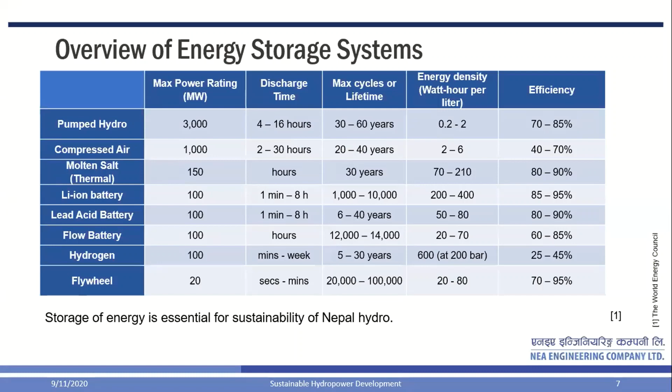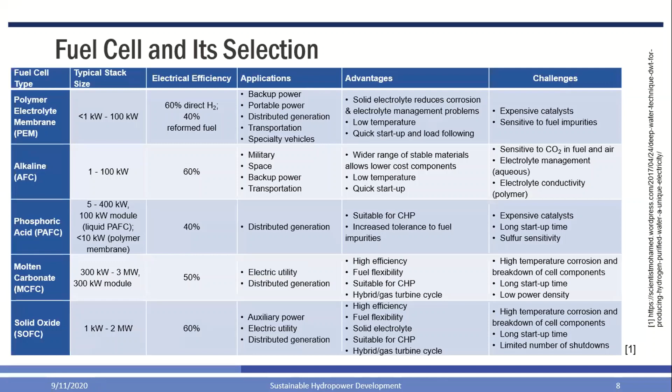But can we find other uses for hydrogen? One is a fuel cell, and I think the fuel cell is still under research even in first world countries. Hydrogen fuel cell for transportation is being commercialized, but it will take time to reach us. But meanwhile, what we can do is generate hydrogen. If we have hydrogen, the vehicle technology can be transported quickly - we can just get the vehicle and we have the hydrogen, we can start the business. The hydrogen generation technology is what we will have to familiarize ourselves with and build our capacity and confidence.

So at NEA Engineering, we wanted to look at the application of hydrogen generation. There are two methods normally used for hydrogen generation. I found that for storage 20 hours a day in the surplus season of monsoon, alkaline electrolyzer is a little bit cheaper than PEM electrolyzer in capital costs. But the startup time and response time are a little bit slow.

During wet season, for 5 or 6 months a year, you'll have plenty of surplus energy, but during peak 4 hours or 3 hours, you'll have to go down. It needs a warm start time - you should stay warm without consuming much energy. So alkaline electrolyzer, I think, fits our requirement.

So we looked at how much we can produce that way, 20 hours a day, if we use a 500 kilowatt hydrogen electrolyzer, and the figures are given there. About 180 kg of hydrogen per day can be produced, which can be used to produce about 1 ton of ammonia per day.

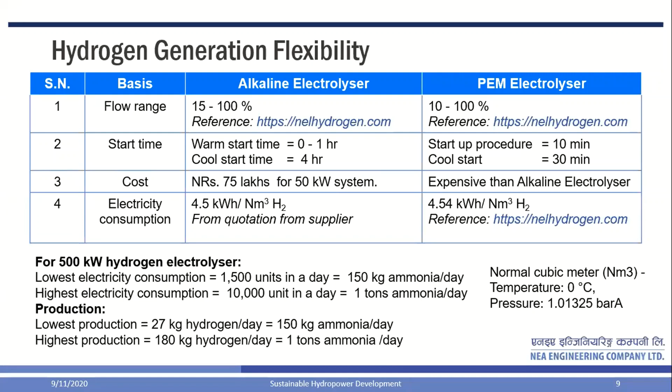The reason for ammonia production is that we have another problem, not only electricity surplus right now - another problem is fertilizer scarcity during the farming season every year. So this hydrogen could be used to produce fertilizer, and from those two products we could probably find a feasible solution. We've already presented the process of hydrogen production and its cost.

We requested some quotations from actual hydrogen producer, small scale hydrogen producing manufacturing companies, and from there - capital costs, energy costs and storage costs - we tried to find out how much it costs for hydrogen production at a small scale.

So at 50 kilowatt, it's quite high, but as you go to 350, 400 kilowatt, the cost seems to flatten. We have not checked at megawatt scale if the cost goes down further, but it looks like after that it doesn't drop so drastically. So we said, okay, let's try a 500 kilowatt hydrogen plant and see how much it costs in capital costs.

Apart from hydrogen production, you also have to filter nitrogen from air, liquefy it, and store it for producing ammonia. So this is the nitrogen production plant, and very small plants are possible to install. We have seen this even in Nepal - in some places the nitrogen producing plants are available and installed.

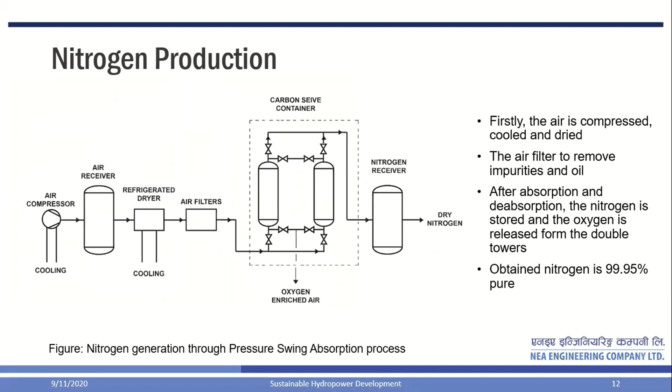From this hydrogen and nitrogen, this is called the Haber-Bosch process. That is a very exothermic process consisting of high pressure and high temperature. But even this is now available in small scale, so we can produce ammonia

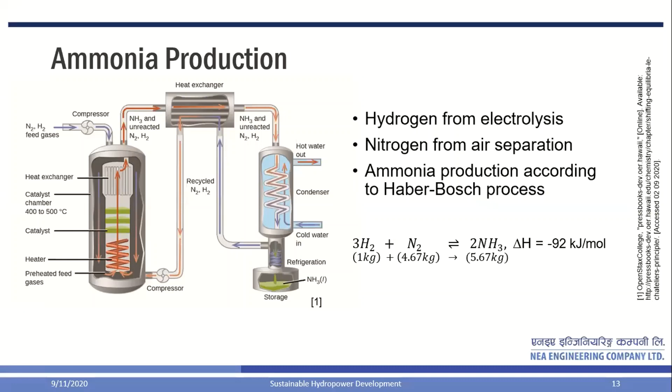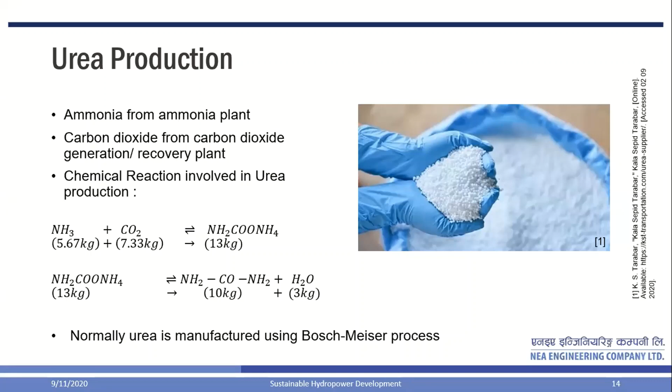from this hydrogen and nitrogen, and thus ammonia can be either used as a fuel for gas turbines, but our aim is to get the maximum value. We thought that the maximum value is available from urea production. We found that about 5.67 kg of ammonia will produce about 10 kg of urea. In the urea production part, we are still looking for a quotation from a manufacturer - right now we haven't had any quotation about what will be the smallest size and what will be the cost. So up to ammonia, we have got the costs from manufacturers.

We looked at the previous study done by JICA for urea production, which was quite large scale. The cost was about $144 million at that time, and it still matches what we found for a 500 kilowatt plant. It's a 76 megawatt plant producing 275 tons per day, which matches our 500 kilowatt case producing about 1.8 metric tons of urea per day. So it's almost the same.

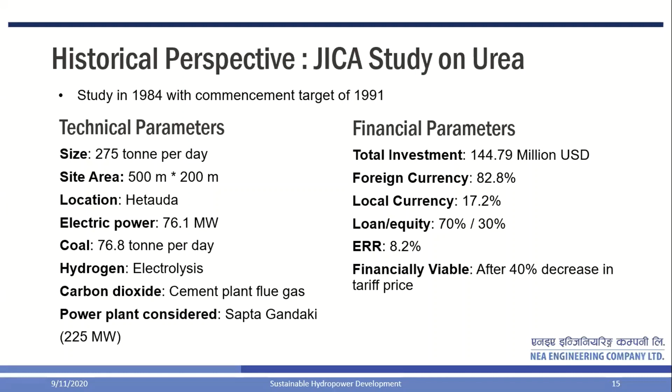The study showed that if the tariff price is reduced 40%, then it is feasible. The tariff used was 3.8 cents per unit, while our present tariff is about 4 cents per unit, so a 40% decrease means about 2 cents. Our policy during wet season is that surplus energy is given at 50% price, meaning the surplus energy is available at 2 cents. So if you have 2 cent energy, the urea plant becomes feasible. These are rough findings, but it seems feasible if the capital cost is somehow subsidized by a soft loan or government subsidy.

This is the capital cost we found out. For 1 metric ton of ammonia production, it's about 12 to 13 crore, which is about 130 million rupees, or about $1.1 million. That includes equipment cost for hydrogen generation, ammonia generation, and hydrogen storage, plus works such as installation, civil works, and miscellaneous works, and services like transportation, labor, testing, and commissioning.

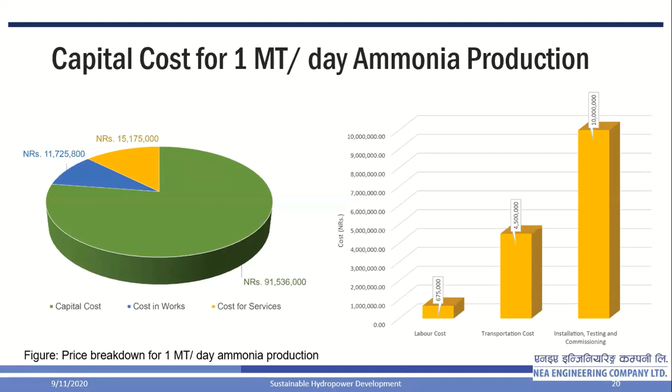This was just to show that we're trying to get a real quotation and prepare a proposal to the government and the utility sector so they are interested to invest in a pilot project. We can talk about principles and theories, but being an engineering company, you want to test that principle and theory, see how much it costs. Seeing is believing, so let's do it. That's been my approach from the beginning, and we've even prepared the layout and the land.

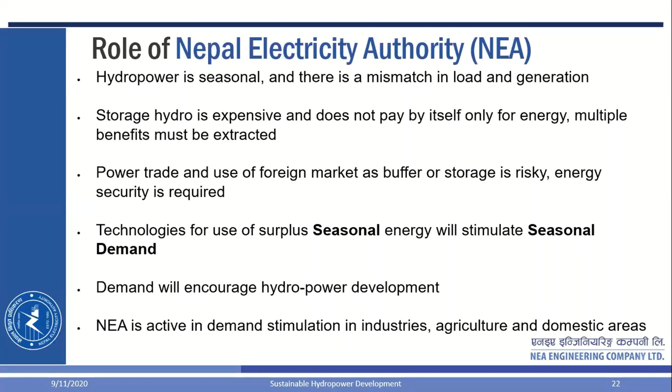NEA is very active in demand stimulation in industries, agriculture, and domestic areas, and seasonal demand is the best fit for NEA. Therefore NEA engineering is looking for research and development in this area. Hydrogen generation using seasonal surplus, 20 hours a day, is one solution. If hydrogen generation helps urea production, it solves two problems of the nation with one stroke. Similar demand industries such as public electric vehicle charging and battery storage, and controllable loads such as cold stores and irrigation pumps, are also interesting.

With better fuel cell efficiencies, hydrogen generation can achieve another double goal, where hydrogen trucks and buses replace petroleum and reduce pollution while also solving the surplus electricity problem. So hydrogen is a very good solution for sustainable hydropower, and NEA and NEA engineering should find ways to invest in research and development with Kathmandu University too. It's a very good thing that Kathmandu University has started the Green Hydrogen Lab, and we are cooperating with KU on that, and we hope to see further progress in coming years.

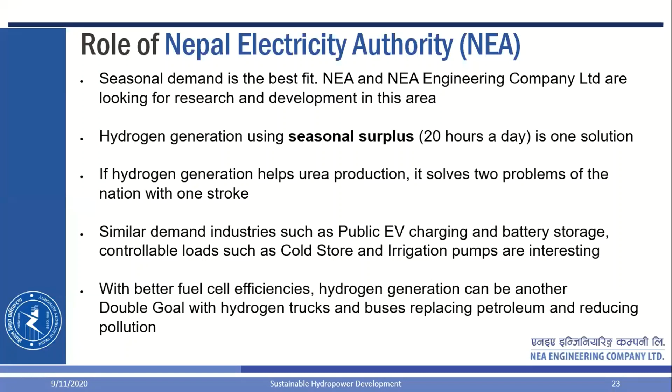Thank you, Hitendra, for your nice presentation, especially for the potential feasibility of using hydrogen in the form of making urea. You definitely highlighted some cost figures as well, which is very enlightening, and you mentioned the surplus energy. The tariff has to go about 40% lower in order to make it more viable. With surplus energy during the season, it has to be worked out more in detail, but if there's a potential industry that would come in, there should be cooperation between government, private sector, and academia, so we can make a useful product locally within Nepal and utilize the immense potential that we have. Thank you again.

I'd like to thank all the participants for being on time. I think we have some time now for questions and discussion. I believe there are questions in the chat boxes, some specifically delegated to specific presenters. If you could take up questions one at a time - I think we have very limited time, so I don't think we'll answer all, but would it be possible for the presenters to look at the relevant question and give a short, specific answer? We'll definitely be capturing all the questions and compiling them into a report as well. So I leave it to the presenters to pick up the questions.